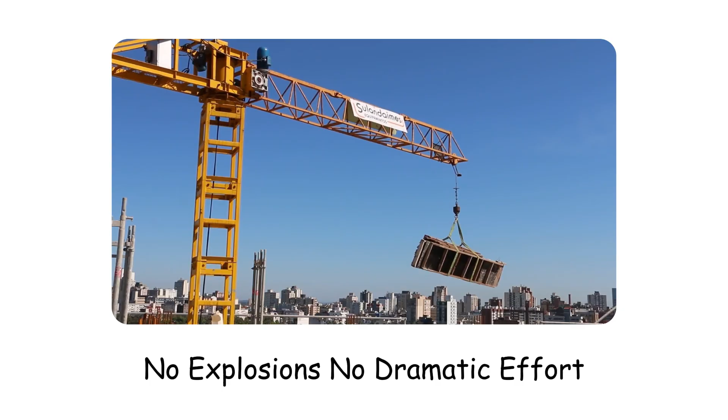Imagine standing beneath a machine taller than a skyscraper. Above your head, a steel beam weighing hundreds of tons slowly rises into the air. No explosions, no dramatic effort, no visible struggle, just a massive structure floating upward with astonishing precision.

At first glance, it almost seems impossible. How can a machine lift something heavier than a blue whale without collapsing under its own weight? How can a crane balance enormous loads while standing on a relatively small footprint? And perhaps most surprisingly, how do operators prevent these giants from simply tipping over?

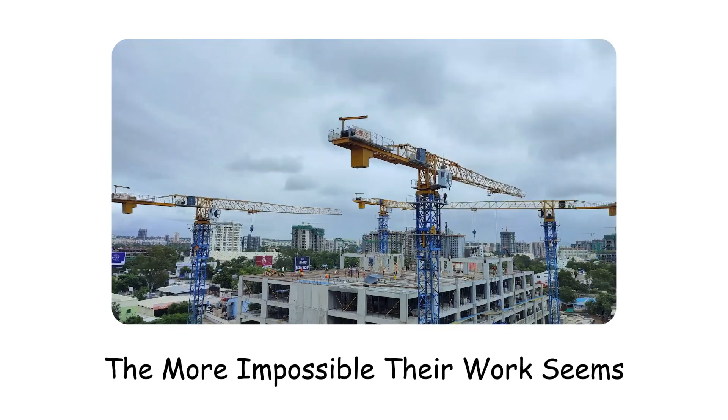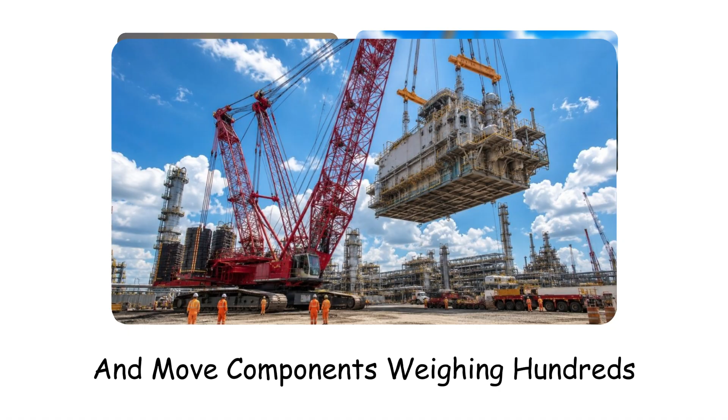Because when you look closely, cranes appear to violate common sense. The heavier the load becomes, the more impossible their work seems. Yet every day, around the world, giant cranes build skyscrapers, assemble bridges, construct ships, install wind turbines, and move components weighing hundreds, sometimes even thousands of tons. Without them, modern civilization would look completely different. This is the incredible engineering that allows giant cranes to perform what often feels like industrial magic.

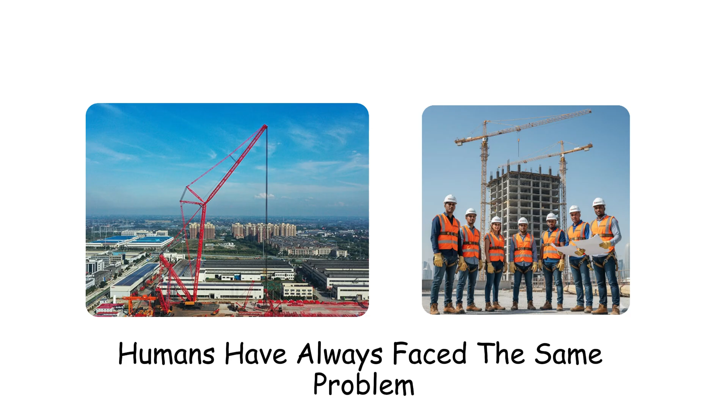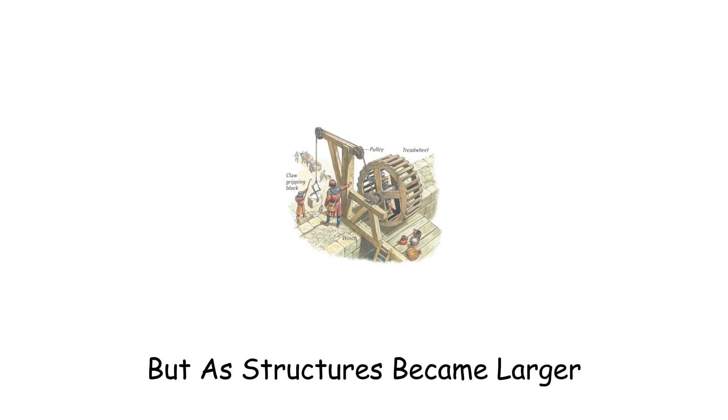The problem with lifting heavy things, humans have always faced the same problem: how do you move something too heavy to carry? Ancient civilizations solved this challenge using ramps, rollers, pulleys, and sheer manpower. But as structures became larger, those solutions became insufficient.

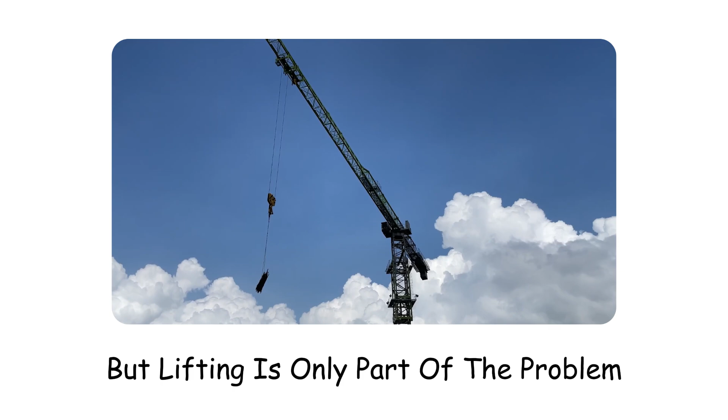Cathedrals, skyscrapers, ports, factories, modern infrastructure demanded something entirely new: machines capable of lifting extraordinary weight. But lifting is only part of the problem. The real challenge is stability, because weight creates force, and force creates danger.

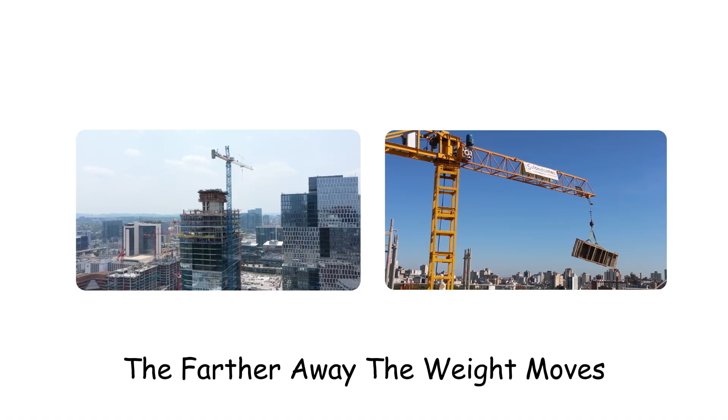Imagine holding a heavy object at arm's length. The farther away the weight moves, the harder it becomes to control. Eventually, your body simply cannot maintain balance.

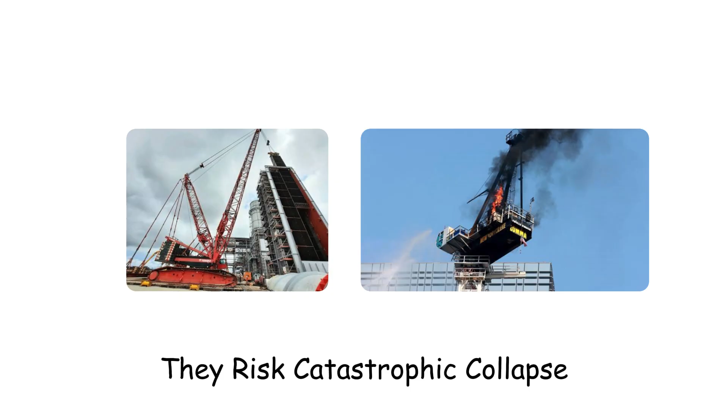Cranes face the exact same problem, except instead of holding a suitcase, they may be lifting hundreds of tons. And instead of risking a sore arm, they risk catastrophic collapse, which means every crane is constantly fighting the laws of physics, every second, every lift, every movement. And the secret to winning that fight begins with one of the most important concepts in engineering: balance, the secret of counterweights.

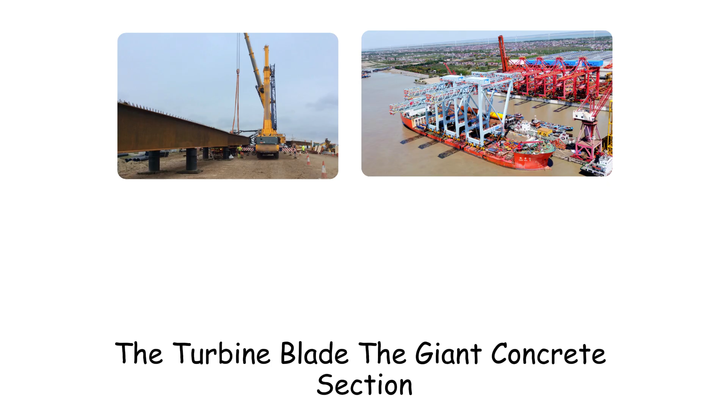At first glance, most people focus on the load, the steel beam, the shipping container, the turbine blade, the giant concrete section. But engineers focus on something else entirely: the force trying to pull the crane over.

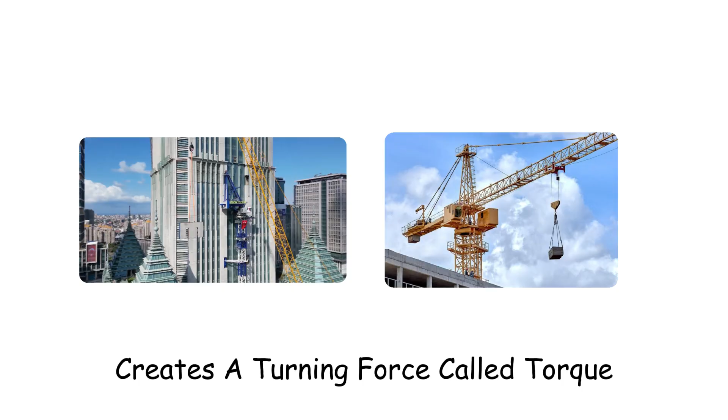Because every weight hanging from a crane creates a turning force called torque. The farther the load extends from the center of the crane, the stronger that force becomes. Without a solution, the crane would simply tip forward.

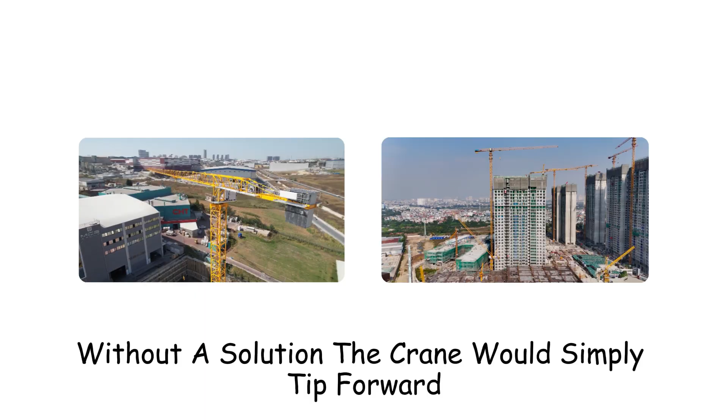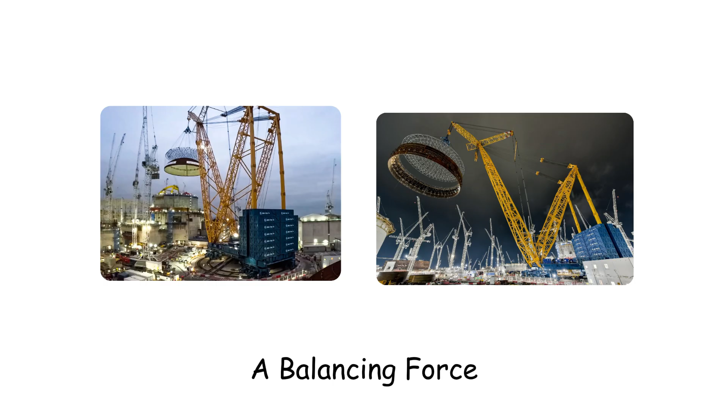That's where counterweights come in: massive blocks of steel or concrete positioned behind the crane. These counterweights create an opposing force, a balancing force, a force that allows the crane to remain stable.

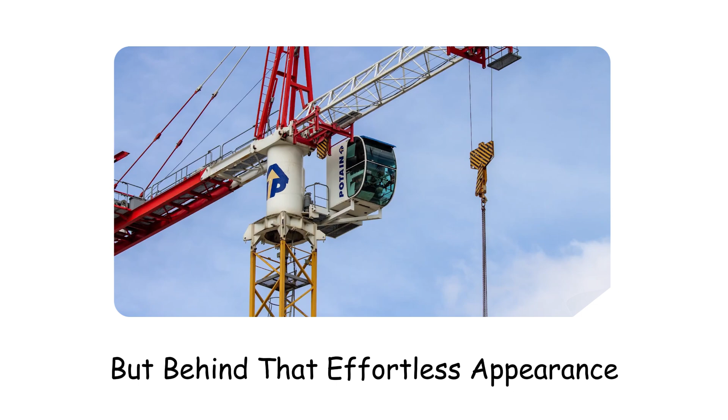It's surprisingly similar to a seesaw, except instead of balancing two children, engineers are balancing hundreds of tons of industrial equipment. The result is a machine that appears almost effortless, but behind that effortless appearance lies a carefully calculated battle between competing forces, a battle measured down to the smallest detail.

Because when hundreds of tons are involved, there is no room for approximation. Some crane counterweight systems weigh more than entire houses. But balancing weight alone isn't enough, because even the strongest crane must transfer those forces somewhere, and that brings us to the ground beneath it.

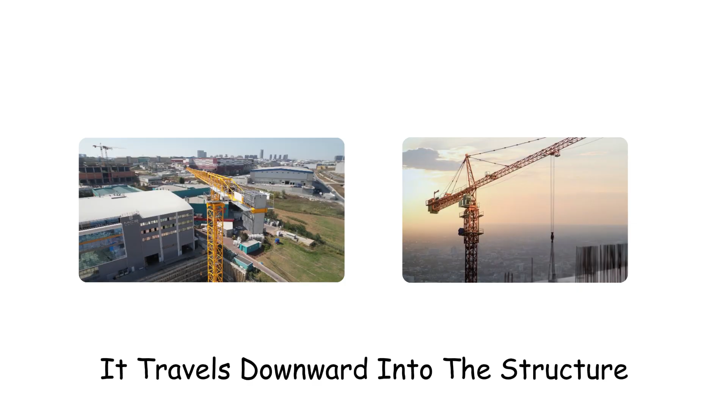The foundation that nobody sees. One of the most important parts of a crane is often invisible: the foundation. When a giant crane lifts a load, the force doesn't simply disappear. It travels downward, into the structure, into the supports, into the earth itself.

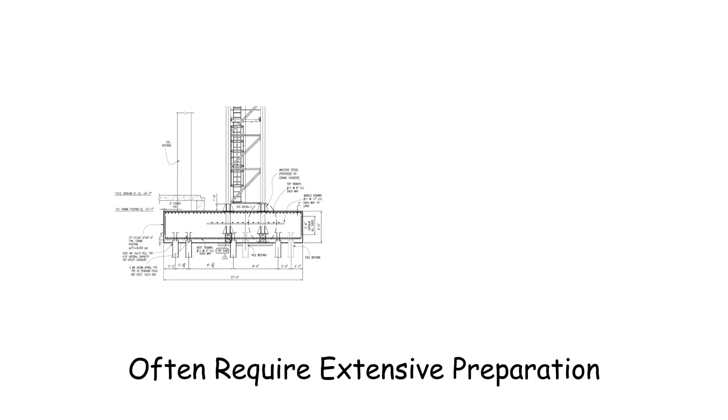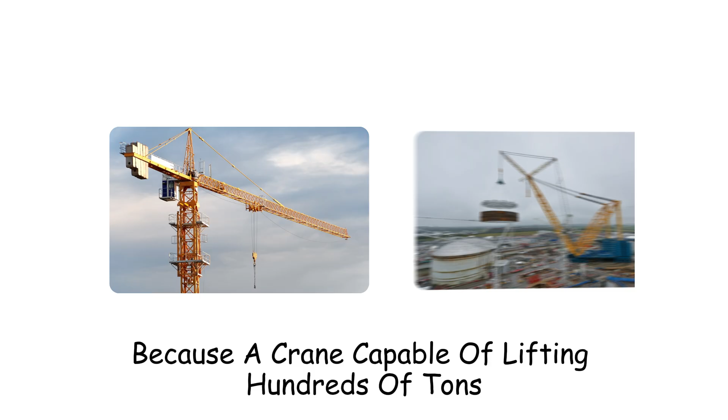A weak foundation can turn an engineering masterpiece into a disaster, which is why crane installations often require extensive preparation. Engineers analyze soil conditions, ground density, load distribution, environmental factors. Everything matters, because a crane capable of lifting hundreds of tons becomes useless if the ground beneath it cannot support the stress.

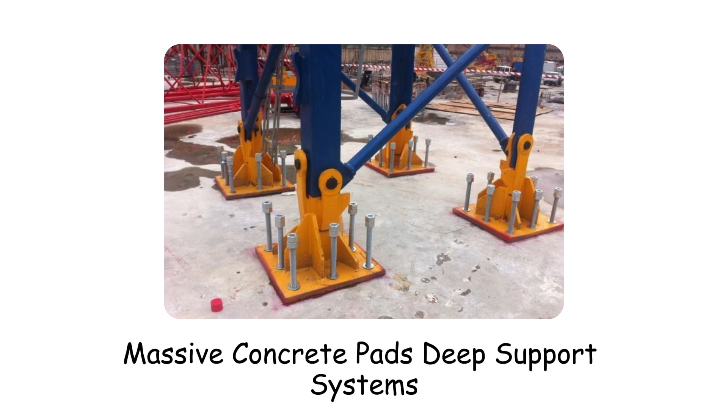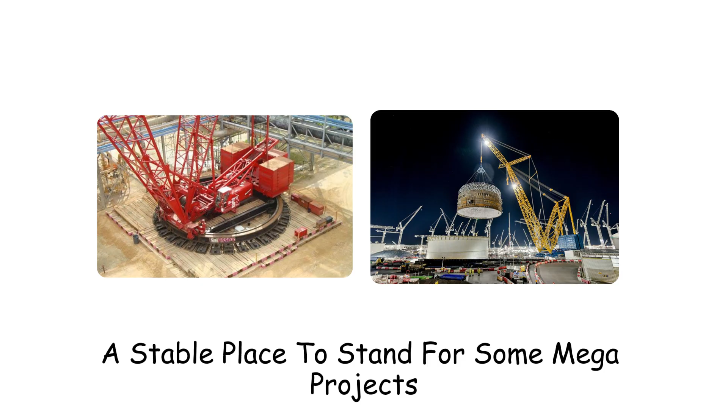In some projects, the foundation takes longer to prepare than the crane takes to assemble. Massive concrete pads, deep support systems, specialized reinforcement, all hidden from public view, yet all absolutely essential, because every spectacular lift depends on something remarkably simple: a stable place to stand. For some mega projects, the invisible foundation beneath a crane weighs far more than the crane itself.

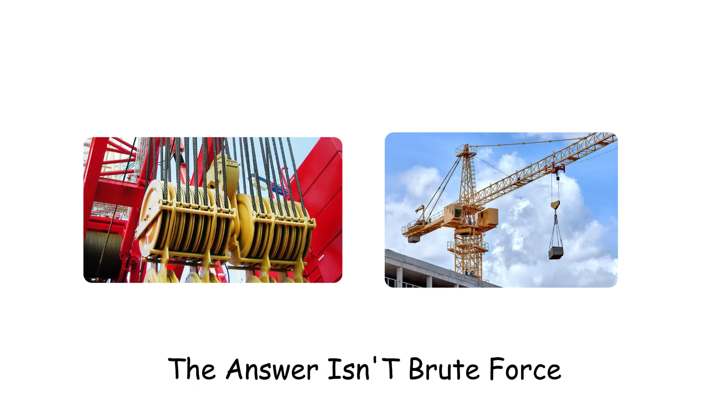And yet, even with perfect balance and perfect foundations, another challenge remains: how do you actually lift hundreds of tons into the air? The power of cables and pulleys. The answer isn't brute force, it's mechanical advantage, one of the oldest engineering principles ever discovered. Giant cranes rely on sophisticated systems of pulleys and cables.

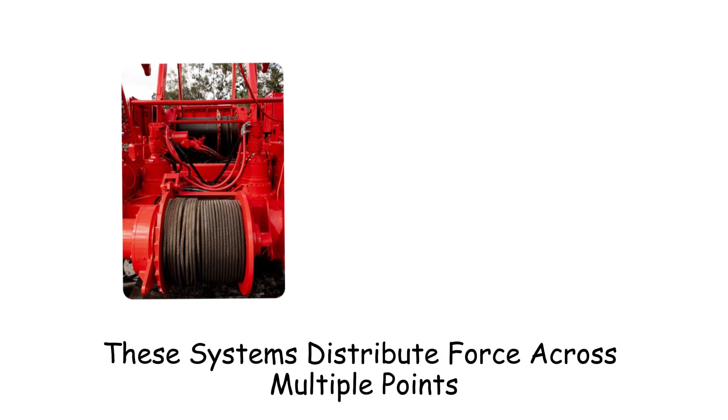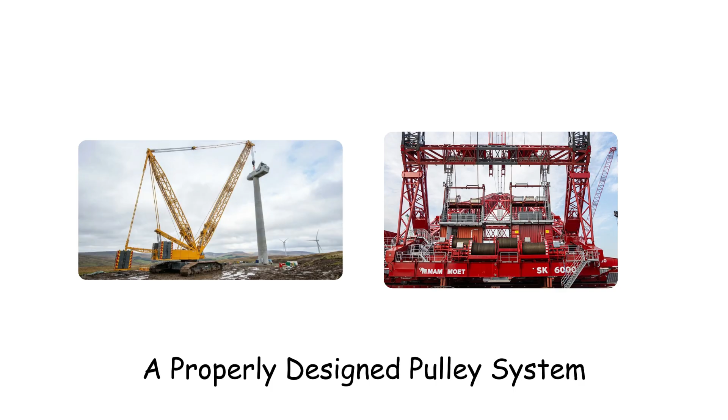These systems distribute force across multiple points, reducing the effort required to move enormous loads. The principle sounds simple, but its impact is extraordinary. A properly designed pulley system allows cranes to multiply lifting capability dramatically. The machine doesn't fight gravity directly, it works intelligently, using physics to its advantage.

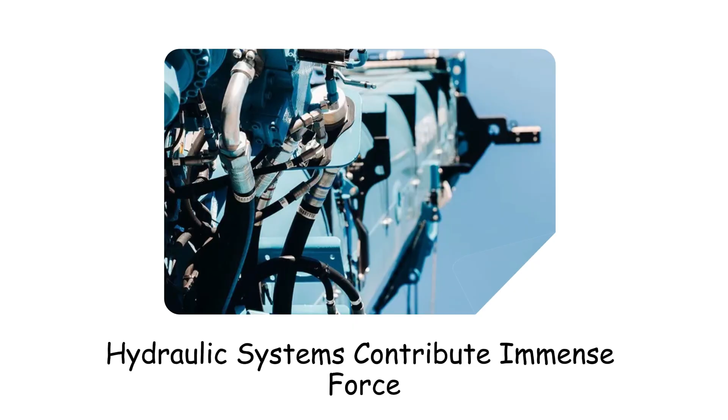Steel cables become the muscles of the crane, massive winches provide controlled movement, hydraulic systems contribute immense force, and together they transform impossible tasks into routine operations. A load that appears impossibly heavy to a human observer becomes manageable through engineering. It's not magic, it's mathematics, and it works every single day.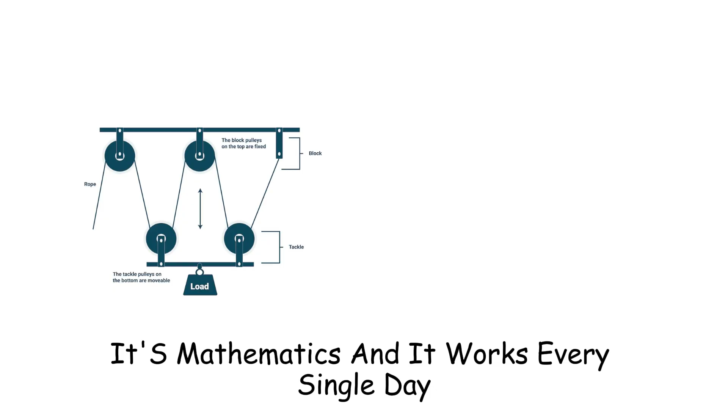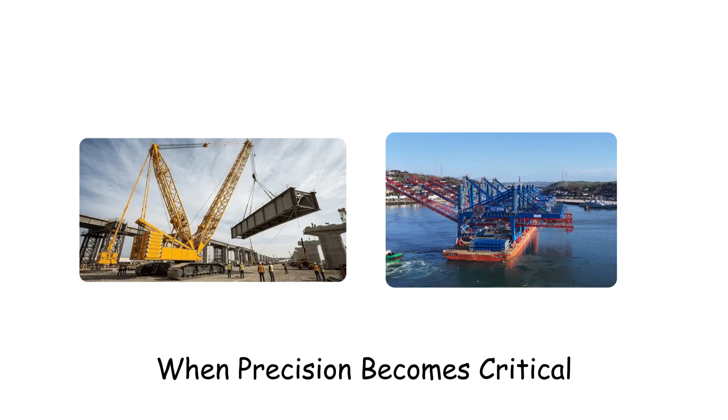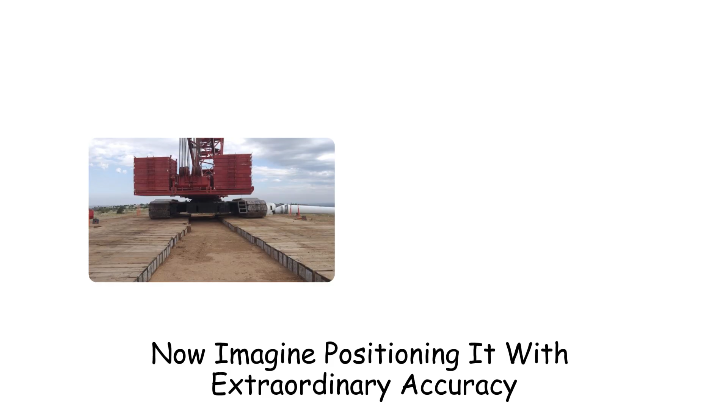Some crane cables are strong enough to support weights that would crush ordinary vehicles instantly, but lifting a heavy object isn't enough. The real challenge begins when precision becomes critical. Moving hundreds of tons with millimeter precision, imagine lifting a massive steel section weighing hundreds of tons, then positioning it with extraordinary accuracy, not within a meter, not within a few centimeters, but sometimes within millimeters. That's the reality of modern construction.

A bridge segment must align perfectly. A turbine component must fit precisely. A skyscraper element must connect exactly where intended. There is no room for guesswork, and this is where crane operators become extraordinary professionals.

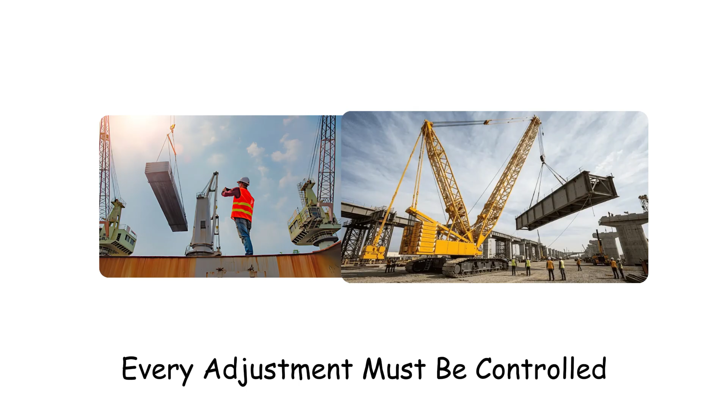They must understand load behavior, wind conditions, swing dynamics, visibility limitations, and machine response, all while coordinating with teams on the ground. Every movement must be deliberate. Every adjustment must be controlled, because when loads become enormous, small mistakes become expensive very quickly.

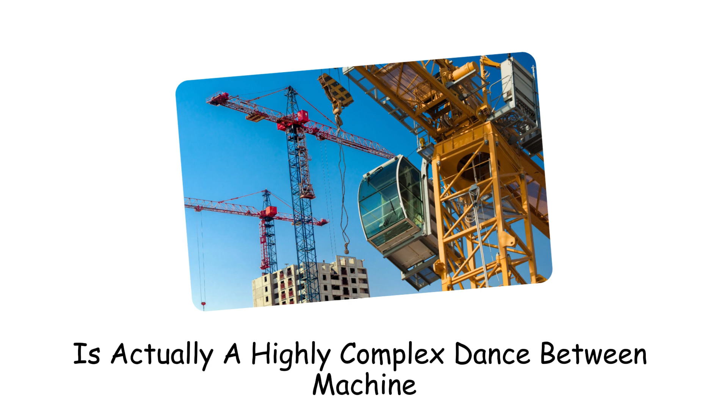What appears from the outside to be a slow operation is actually a highly complex dance between machine, operator, and physics. Some crane lifts require months of planning for operations that last only a few minutes. And nowhere is that complexity more visible than in the largest cranes ever built.

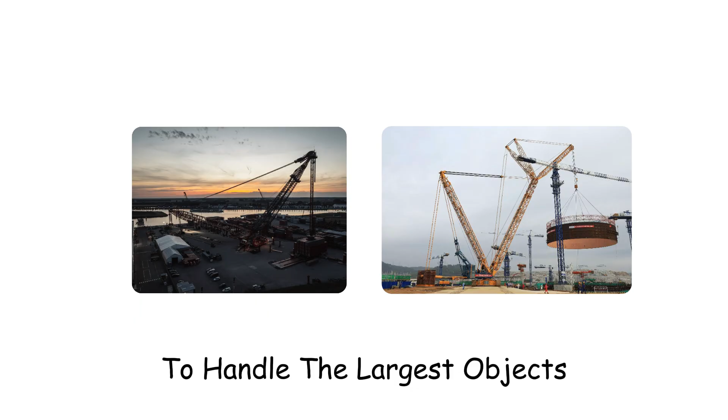The giants of the crane world. Not all cranes are created equal. Some are designed for construction sites, others for ports, others for offshore platforms, and some exist specifically to handle the largest objects humans have ever attempted to move. These mega cranes push engineering to extraordinary limits.

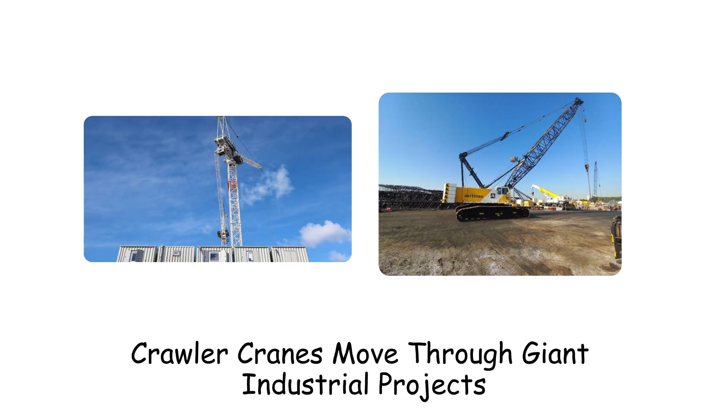Tower cranes dominate city skylines. Crawler cranes move through giant industrial projects. Floating cranes operate at sea. Port cranes unload enormous container ships. Each design solves a different problem, and each reflects decades of engineering evolution.

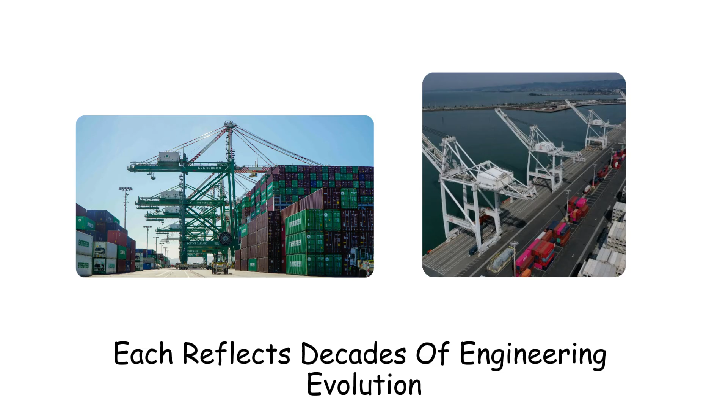Some rise hundreds of meters into the air. Others lift weights so large they challenge imagination. Watching these machines work can feel surreal. Tiny workers move around structures larger than buildings. Massive loads rise slowly against the skyline, and physics itself seems to bend before your eyes.

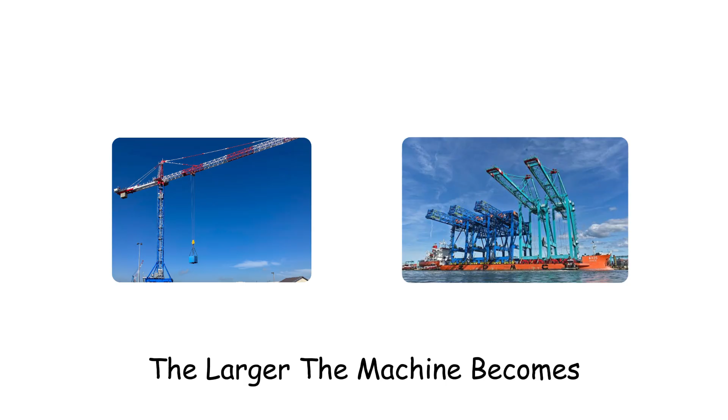But every movement remains governed by the same principles: balance, force, control, and precision. The larger the machine becomes, the more important those principles become. Some of the largest cranes ever built can lift loads weighing thousands of tons in a single operation. Yet perhaps the most remarkable thing about cranes isn't their size, it's what they make possible.

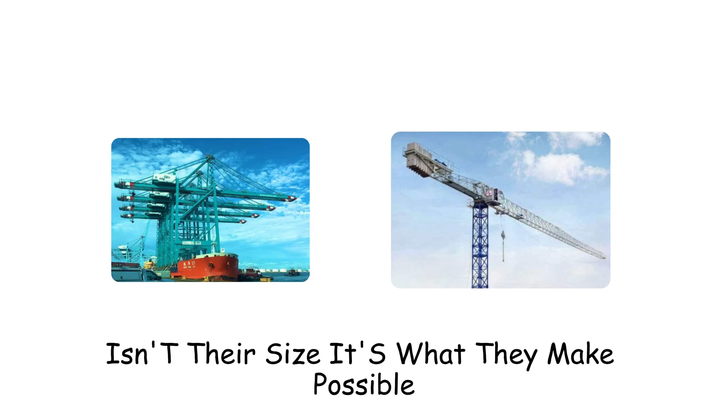The machines that build the modern world. Look around any modern city: skyscrapers, bridges, power plants, ports, factories, wind farms. Almost every major structure owes part of its existence to cranes. Without them, construction would slow dramatically, infrastructure projects would become far more difficult, and entire industries would operate differently.

Cranes are rarely celebrated. They rarely appear in headlines. Most people pass them every day without giving them much thought. Yet they are among the most important machines ever created, because they solve a challenge that civilization repeatedly encounters: moving the unmovable, lifting the impossible, turning ambitious ideas into physical reality.

Every skyline tells part of that story. Every bridge, every port, every industrial facility. Behind each one stands a crane, or many cranes, quietly doing work that once seemed impossible.

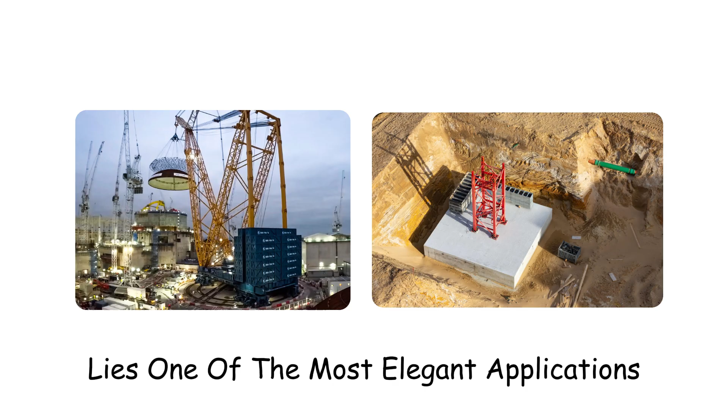At first glance, a giant crane appears simple, a machine lifting heavy objects, but beneath that simple image lies one of the most elegant applications of engineering ever developed: a machine balancing enormous forces, distributing weight with extraordinary precision, transferring stress safely into the ground, using cables, pulleys, hydraulics, and mathematics to overcome gravity itself.

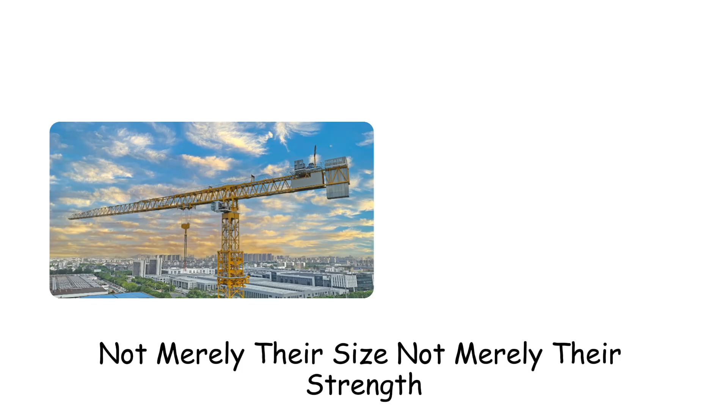Every lift is a demonstration of physics in action. Every successful project is proof of human ingenuity, because giant cranes do far more than move steel and concrete. They make modern civilization possible, and perhaps that's what makes them so fascinating. Not merely their size, not merely their strength, but the fact that they allow humanity to build things that would otherwise remain impossible dreams.